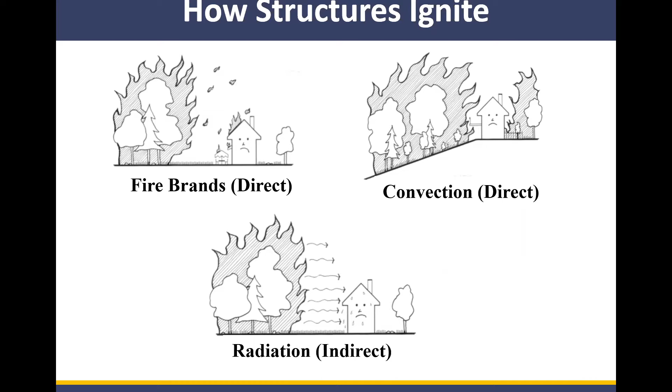To get us started, I'd like to review some of the different ways that structures ignite. Generally speaking, there are two different ways that a building can ignite from a wildfire: the first is through direct contact with flame, and the second is through indirect contact through the heat generated from the flame. It's helpful to understand these differences when we look at our own homes and try to identify areas that might be in need of repair.

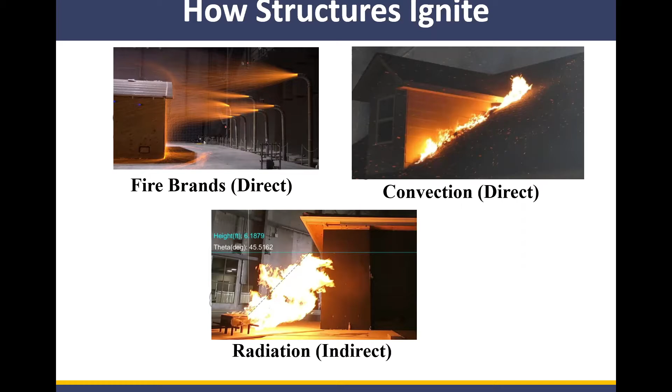When we talk about firebrands, we want to look at areas where embers may penetrate into the home or into the wall of the home and ignite material. With convection ignition sources, we want to look at areas where fuels are accumulating adjacent to the home, or maybe a broom or some structures leaning up against the home that can ignite and transfer heat into the home itself. And with radiation, we want to look at things near the home, like piles of firewood or a lawn chair made out of wood that can catch easily from embers and transmit that heat through the air into the home.

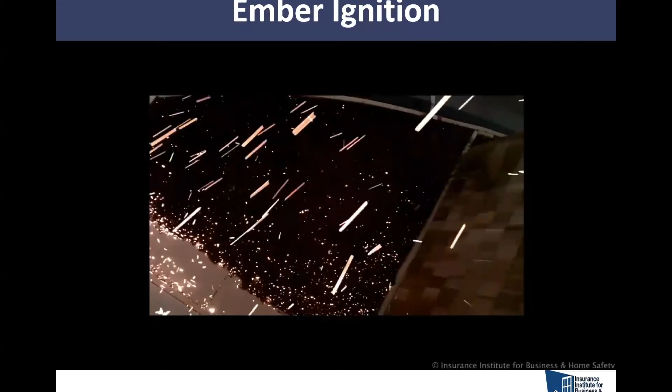To see how this process works, you can see how the ember storm here is slowly accumulating more and more heat into that inside corner of the house, where it eventually ignites the lawn in front of it and will start to generate a heat source right next to the house itself.

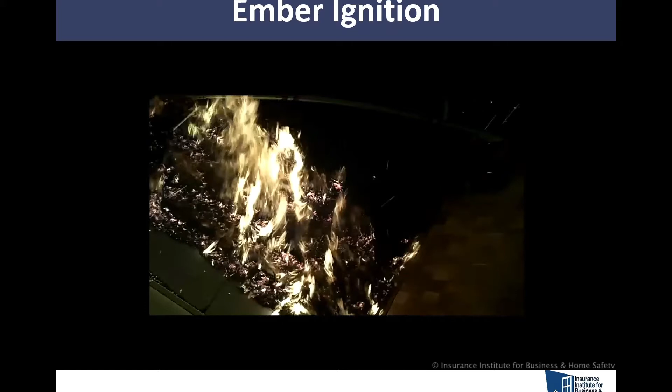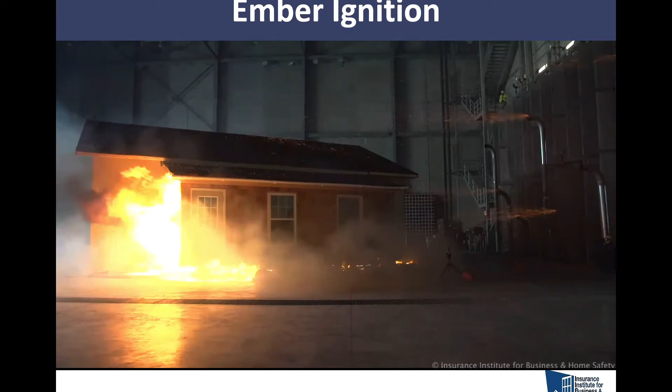Here's another angle of that same video, and you can see how big of an impact the different structures of the house itself have on the acceleration of that fire. With the way the deck is positioned and where that trellis is positioned, they present really easily accessible fuels that the lawn that was ignited earlier can build up into, and then start creating a heat source that is directly attached to the house.

Modifying your home to address structural vulnerabilities can seem like an ambitious challenge at times. There's also the cost and the time component to think about. You never want to be halfway through replacing your tempered glass windows when the spring storm comes through and you end up with 3 inches of snow in your living room.

Today I'm going to go over a few home hardening recommendations that can help further reduce your risk. But please keep in mind that you can take these as far as you want. If you can't replace all the vents around your house, for example, start from the ones at the bottom and worry about your attic vents later once you have more time or the weather dries up a little bit more.

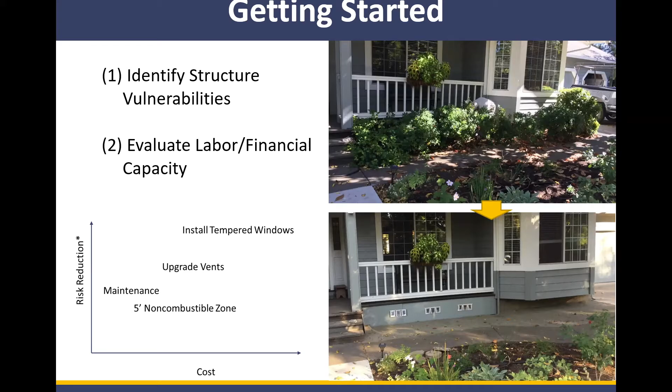When hardening homes, I always like to start by prioritizing the areas that need the most amount of work. To do this, I like to take a walk around the house and just look for areas where there's signs of damage or where there's signs of a lot of debris accumulating. The thing that's important to remember is that wherever trash or needles or leaves can blow in, so can embers and so can flaming pieces of debris during a wildfire.

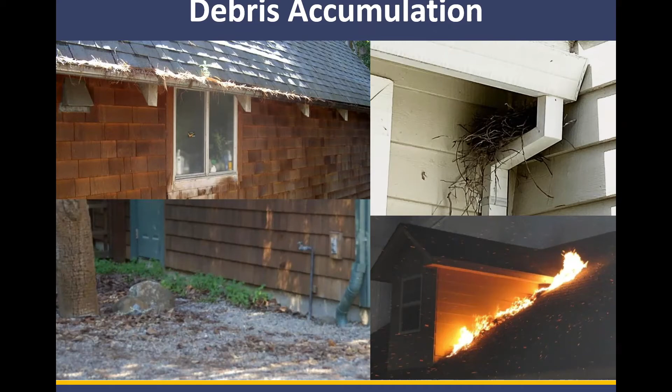If you don't have a giant pile of needles leaning up against the side of your house and the rest of it is in relatively good condition, the next thing to look at are any inside corners. These are areas where the wind can become still and debris can easily blow in and get trapped. Unfortunately, there's not really a good way to modify your house to reduce these areas other than redesigning the shape of your house.

So unfortunately, you're just going to have to go through and make sure they're well maintained year to year. One final thing to look for are any areas where debris is accumulating next to a weak point. You can see here on this photo on the bottom left, there's a little bit of green material right underneath the siding. That siding is actually doing okay because it's adequately spaced off the ground. But if it were down low to the ground, or if there was a crack or an issue with that siding, that presents an entry point where fire can actually penetrate into the home.

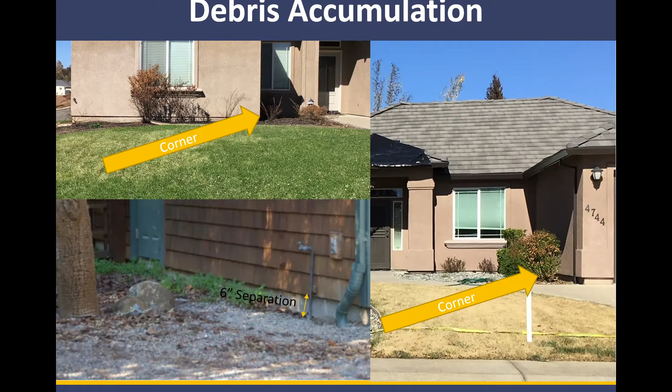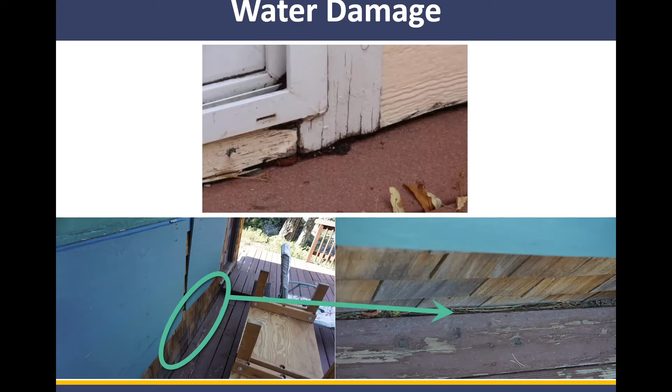Another way to look for vulnerabilities is to look for water damage on the house. If water can penetrate into the house, it'll oftentimes create a soft spot where rot can occur, or the wood itself is weakened and more susceptible to ignition from embers. In addition, any gaps between the siding or your decking, or just between boards along your wall, create an opportunity for debris to get trapped and once again be easily ignited by ember attack.

You might notice how a lot of the vulnerabilities we're talking about today relate to debris accumulation and ember impact on the home. The reason for this is that during a wildfire, the actual time in which the active fire is directly impacting the home is quite low compared to when embers are assaulting the home, either during the pre-fire front or during the post-fire front. For this reason, we're not trying to make homes non-combustible, but instead we're trying to make sure that the embers hitting the home have a lower chance of igniting it.

So I'll share some upgrades that you can use to reduce your home's risk from wildfire. The first one is vents. From a lot of the research that we've seen over the years, by upgrading the type of mesh you have on your vent, you can actually increase the number of embers that are caught and block them from entering your home. This obviously doesn't apply equally to all vents.

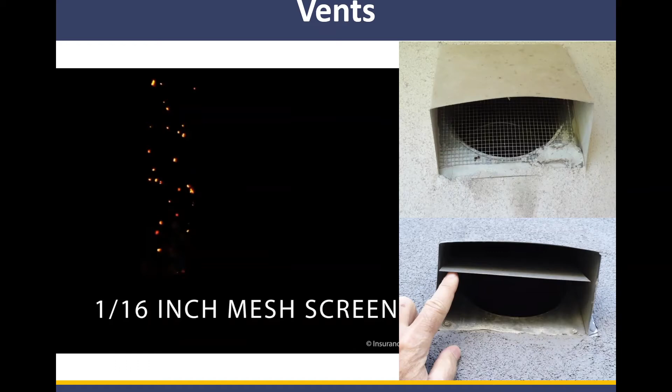With a dryer vent, for example, because there is still a mesh screen there and you have a lot of lint behind it, we actually recommend getting a flap style vent. That way it'll completely shut itself off when the dryer's not running, and so if there's a wildfire coming, the embers won't be able to penetrate that solid flap.

If you're willing to spend more money, there are other vent designs that can be used. On the top left, for example, there's a Vulcan vent design which uses intumescent paint that actually expands when it's exposed to high heat. This means that when a fire is approaching, the vent itself will actually close off all of the openings, and so embers can't penetrate it. These vents are a one-time use vent, so you will have to replace them after they're exposed to fire, but they are very effective at blocking embers from passing through the vent into your attic or your garage space.

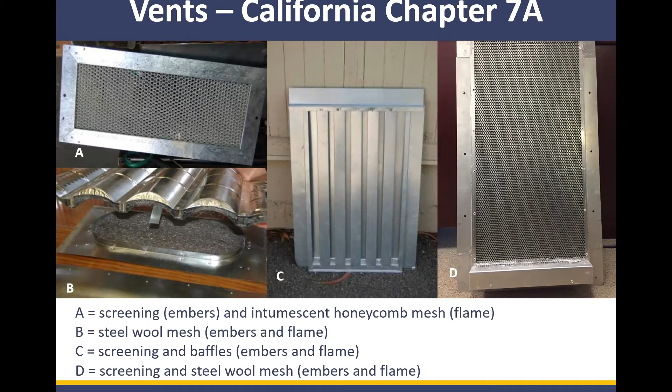Other vent designs include the steel wool mesh approach there on the bottom left, or baffling system, which basically creates a series of channels that an ember has to pass through, making it more difficult for the ember to physically move from outside of the house into the interior cavity behind the vent.

Windows are another vulnerable part of the home that can be reinforced. When a window is exposed to fire, the glass in the middle of the window actually expands more quickly than the glass behind the wooden framing holding it in place. This difference in thermal expansion is actually what causes the glass to crack. Installing tempered glass or dual pane windows can help drastically reduce the chances of ember entry during fire.

Typically, the point of failure with the window is with the glass itself. Once the glass breaks, if a large piece of it will fall out of the window, it creates an opening in the glass itself. With dual pane windows, it's less likely that both windows will shatter in the same way. And with tempered glass, the heating point is actually so high that it's unlikely that fire alone will break the glass.

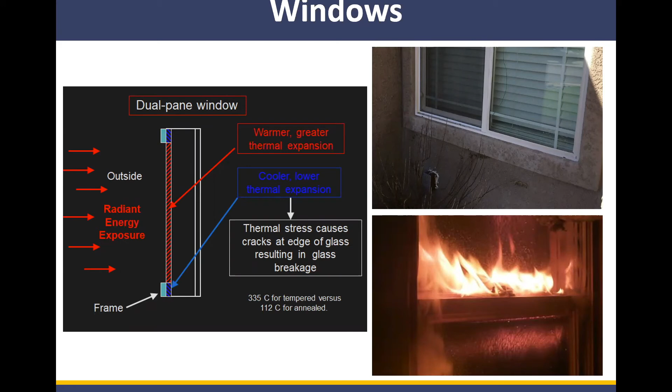One thing that's come up a little bit more recently is whether or not vinyl windows can be used. Vinyl windows are fine to use as long as there's a metal shim holding the glass in place. Because vinyl does melt when exposed to fire, you can actually lose integrity on the frame of a vinyl window. But as long as there's a piece of metal inside the frame holding the glass in place, it'll still retain the integrity of the glass and keep embers from penetrating through it.

Another way to improve your home's hardiness to wildfire is upgrading the siding. Fully replacing the siding of your house can be a pretty costly endeavor, but as with vents and other modifications, you can do this piecemeal as well. You can see here in the example that the homeowner actually replaced the bottom half of the house with metal siding to make sure that there was no combustible material at all below the snow line there.

This particular homeowner did end up replacing the wooden siding with Hardie board as well, since he had the entire wall down, but this is definitely something that you can do in stages or piecemeal if you don't have the time to do the full upgrade like you see here.

It's worth noting that none of these home modifications happen in an isolated space. In addition to the siding modifications and the upgrade to a different vent design that you can see, you'll notice how the homeowner actually moved the landscaping out as well. By integrating the 5-foot non-combustible zone with home hardening modifications, the two pieces can actually work in tandem to further increase your home's resistance to wildfire.

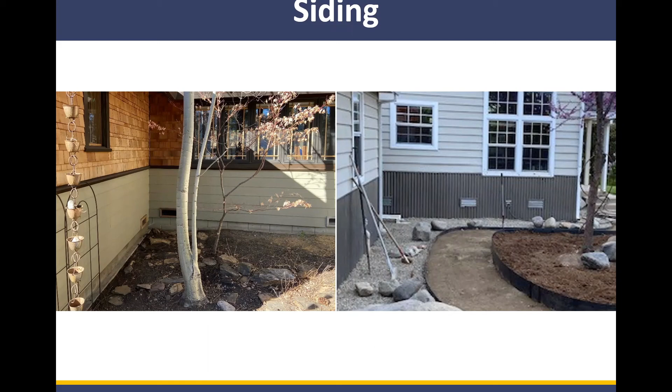Moving the tree further out means that there's less litter drop directly adjacent to the home, which means lower maintenance costs for the landowner. In addition, that tree is no longer positioned directly in front of that window, so that if there is a fire, there isn't a flame source that is directly impacting that particular window.

A final suggestion to leave with you, and this is actually something that I need to work on myself this summer, is to ensure that the non-combustible zone wraps around the entirety of your house. By replacing the 5 feet of fence line closest to your house, you can actually ensure that there's no direct pathway for fire to move from a wooden fence into your home structure. You can do this with a metal fence or vinyl fence, anything of that sort. And the benefit of this is you can actually keep part of your wooden fence and retain that privacy benefit while also reducing the fire risk to your house.